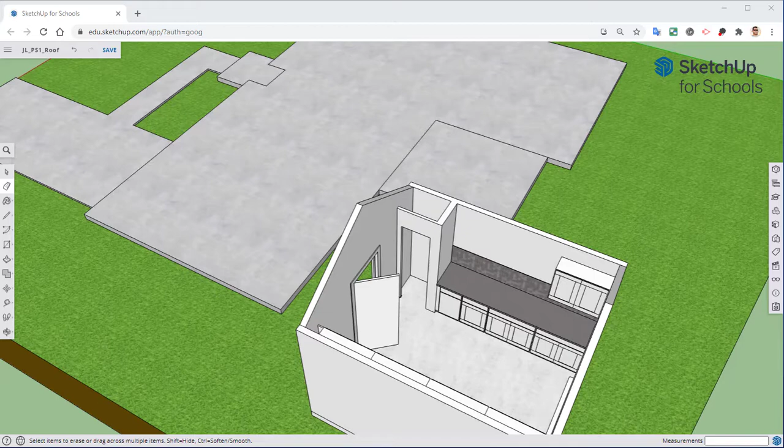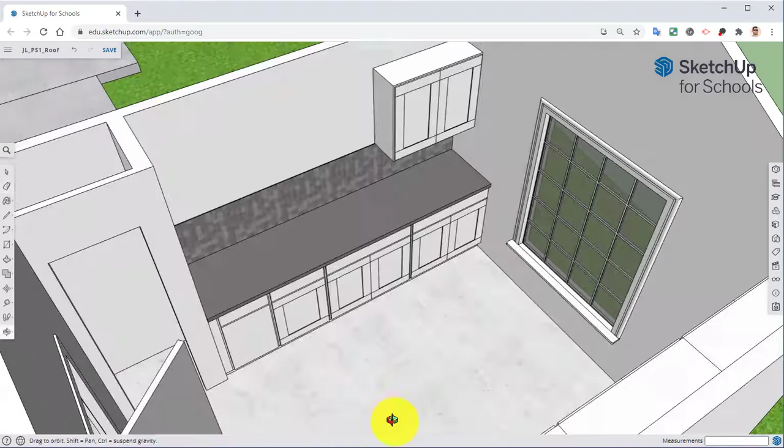We're also going to work on putting in some textures both on the inside and the outside. I've also finished up most of the shaker style cabinet doors, so that's something we'll finish up. I'll do our last one right here, and between that and the last one we did in the previous episode, you'll go in and work on finishing up the rest of them on your own. So let's get started.

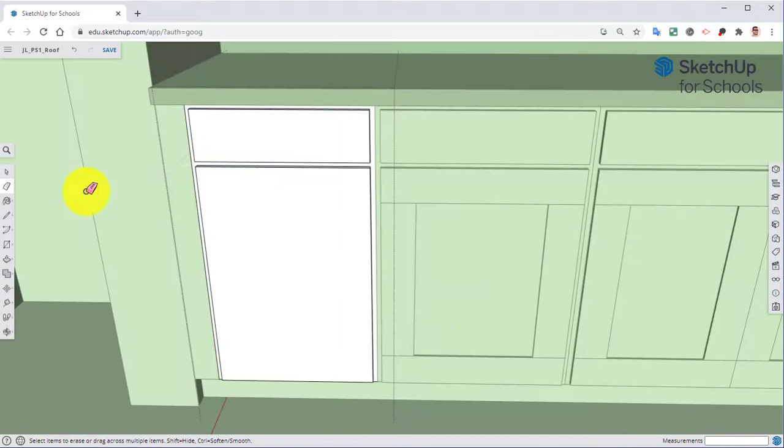For the shaker style cabinets, we're going to take our tape measure. All of these are 3.5 inches, so I'm going to go through and create a guide that is 3.5 inches.

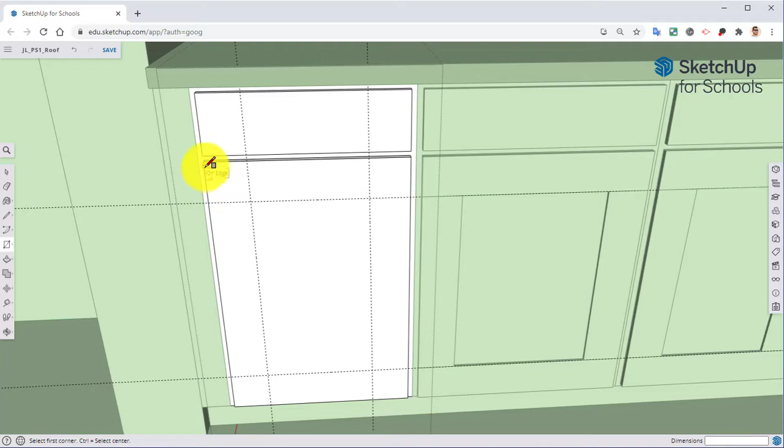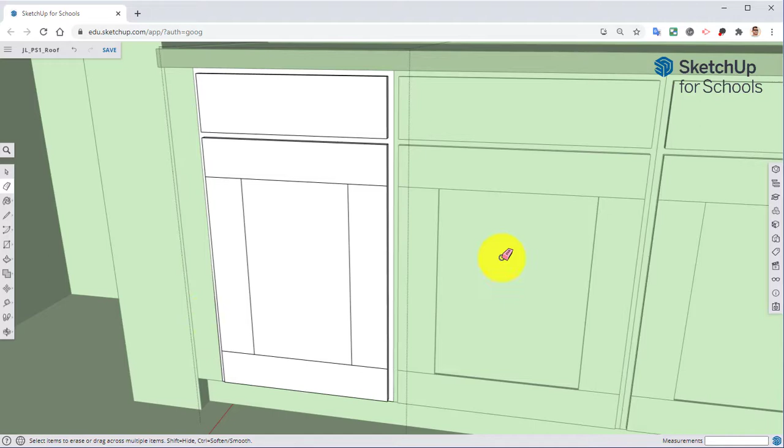With that, take our rectangle tool. We go the full length on the top and bottom, then go in and fill in the middle areas on both the left and right sides. With the eraser tool, we can erase our guides - you can leave them up if you're doing the rest of them. I completed mine a little bit ago, so I'm going to go ahead and erase mine.

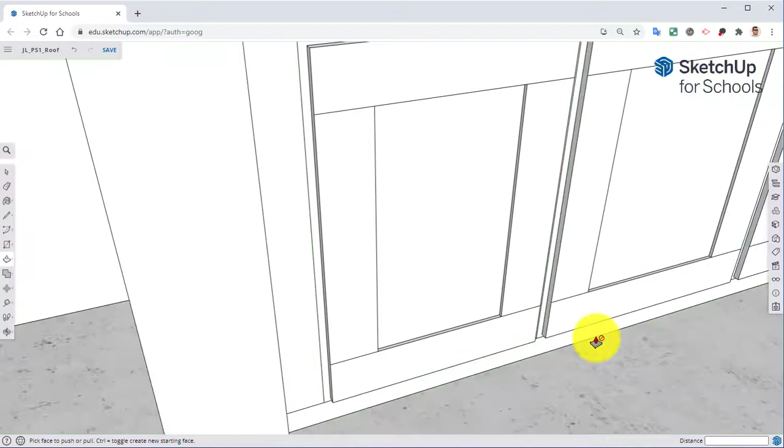Next, click on the push-pull tool. On the center part, push it back a little bit. Type in 0.25, hit enter, and that pushes it back just a quarter inch. Right-click, close component, and that's all there is to it.

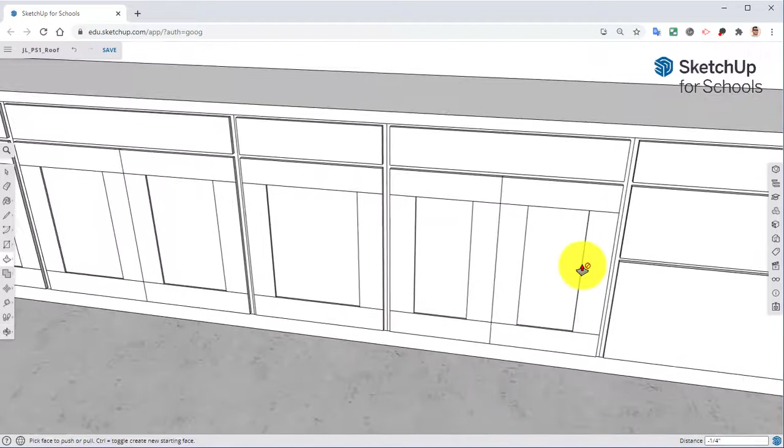The rest of these - once you do one, it's going to work for others, like this right here. These two right here are copies of this right side, so once you do both of these two, those two will be done as well. I didn't really touch these since I'm mirroring those off of those, so you don't have to do any of that, just the large doors.

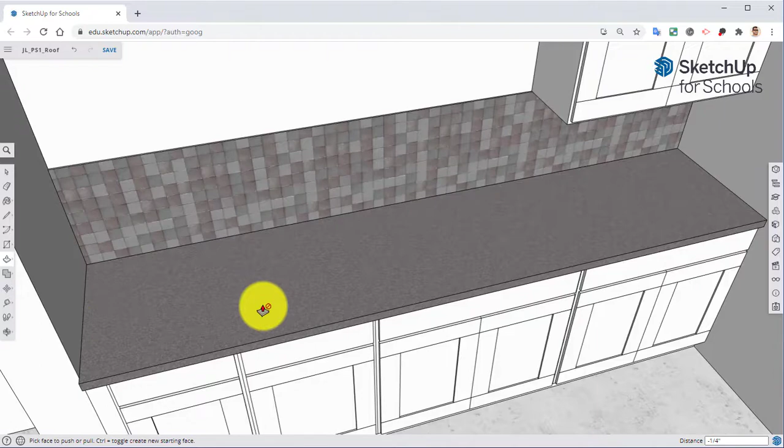Over here, we started putting in textures as well, so we're going to do that here in a second. I'm going to finish up the closet door first, but that's what we're going to go and work on and try to mirror on the other side.

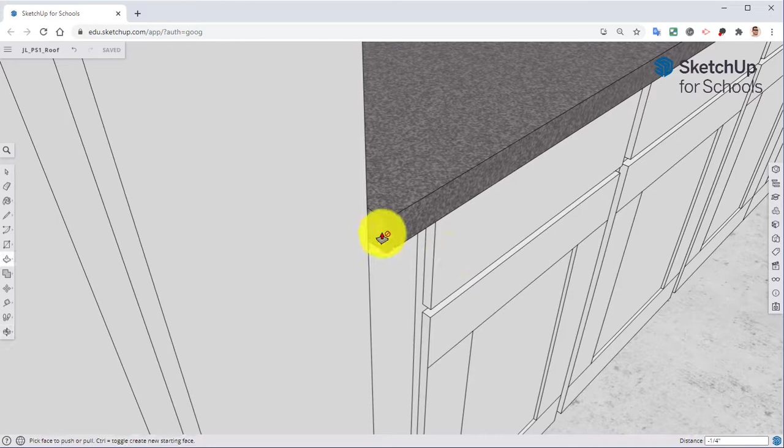For the door, there's, at least on my understanding, not really a way to put a door here, plus we have the overhang of 1 inch here. So what we're going to do is right click, edit the wall here, use the push-pull tool, and pull this wall out 1 inch. Then we're going to close the group.

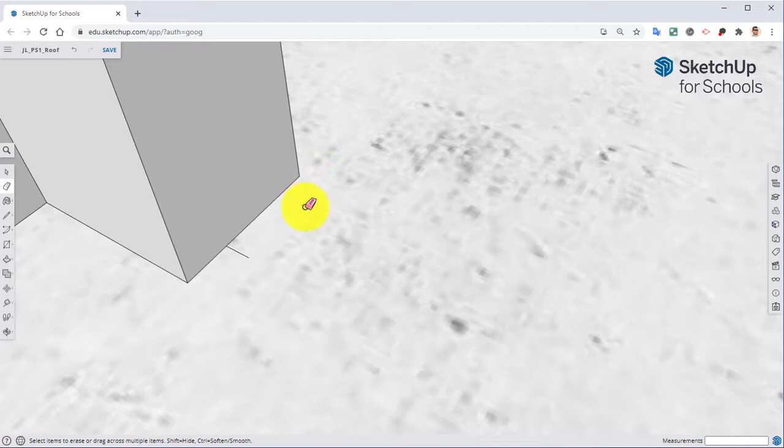Down here, we're going to create our trim for the actual door. Take our tape measure, go from the wall outwards 0.5 inches. I want to click once, drag it back to where it's actually set at 0 inches, click there, then pull out from that point 0.5.

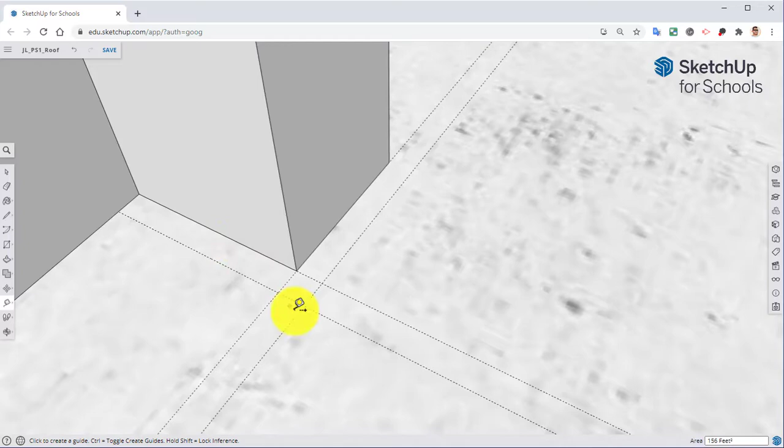I want to create a guide right there, so I'm just going to double click along the wall. I'm going to go to the opposite side, go from this guide back 2.5, double click right there, and 0.5 right there.

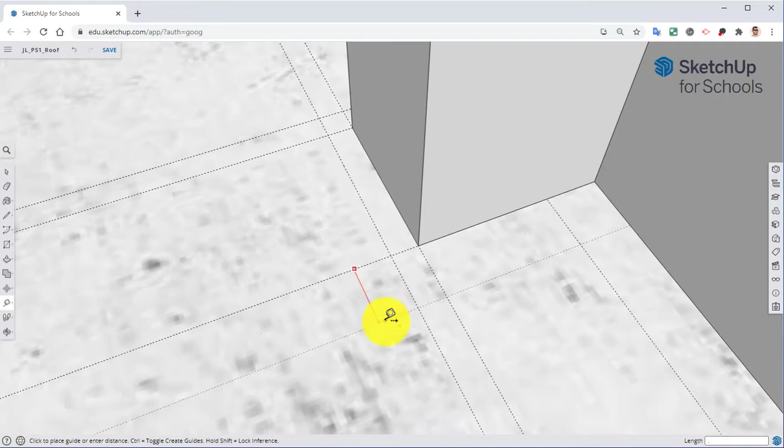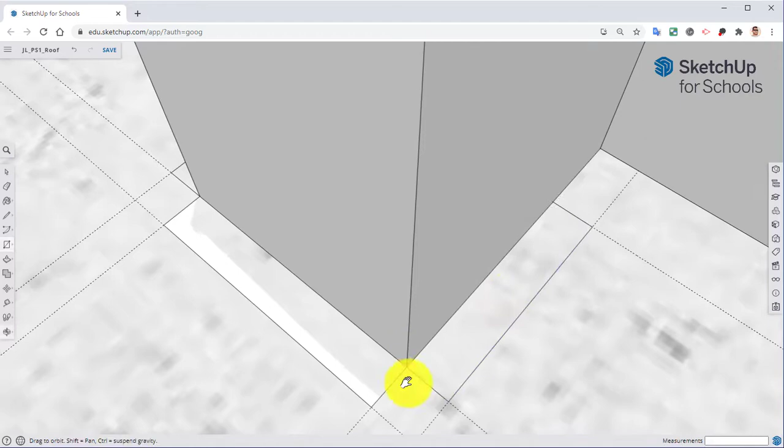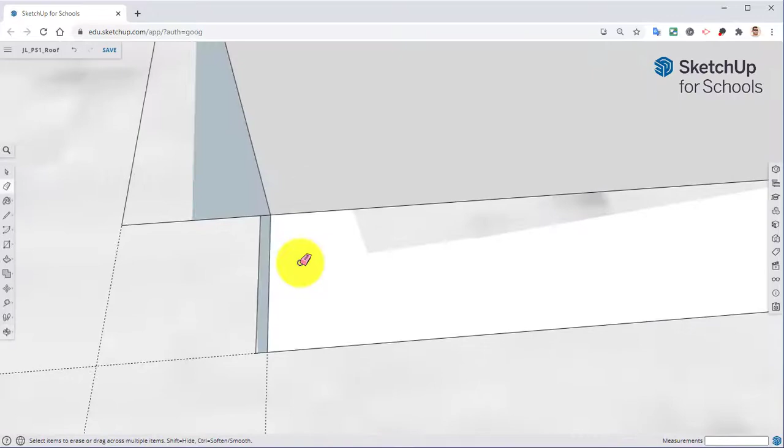Now let's select the R key for the rectangle tool and draw in our rectangles. I do need these to be connected, so I'm going to draw a little sliver of a rectangle on each side, sort of mimicking paint and caulk and everything like that - that would kind of be there just to give us where it's connected. We'll be using the Follow Me tool, so we need all this to be connected so it makes everything easier.

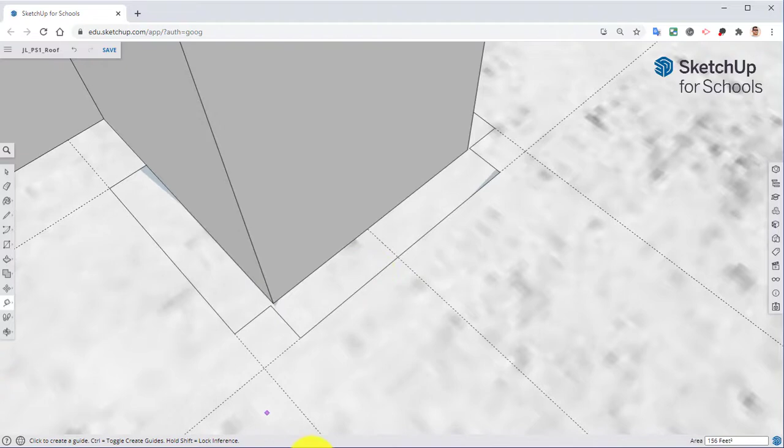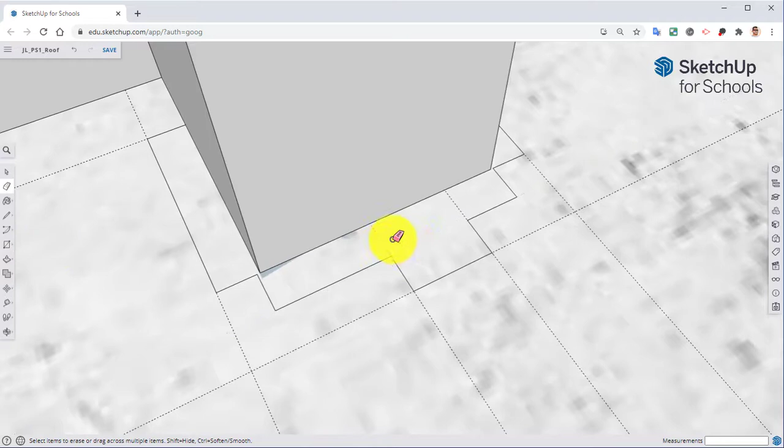From this point, our thickness of the door is 1.38 inches, so we're going to type in 1.38 - that's the thickness of the door. From this point, we're going to go 1 inch for the door jamb. Click the rectangle tool - first draw in 0.75, then take the rectangle tool and draw in our rectangle. Now we can clean up all of our lines and we have our trim.

Take our line tool, go in, and I'm going to draw a line around our door.

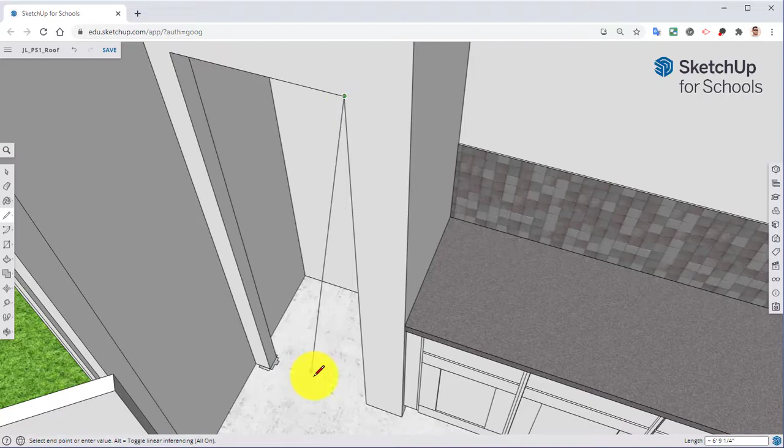Hit escape, hit the space bar on your keyboard. Hold down shift, click on all three of those lines. If you can't tell that you clicked on it, you can move a little bit and you'll see where it tints blue.

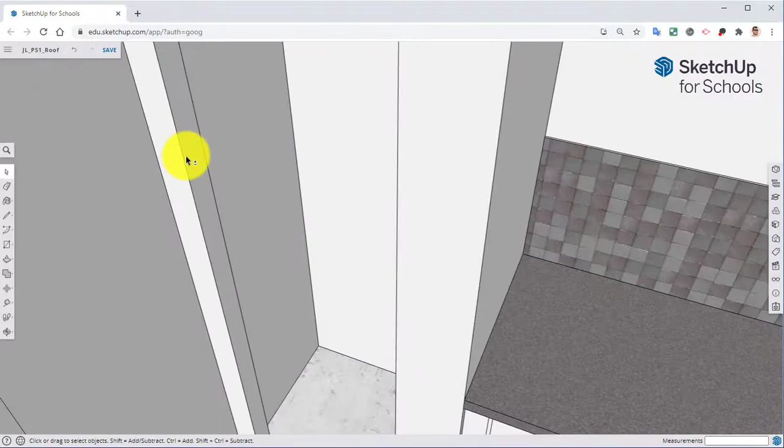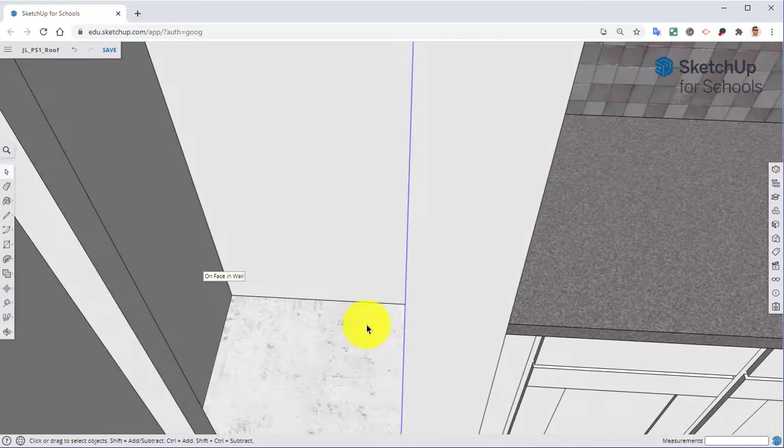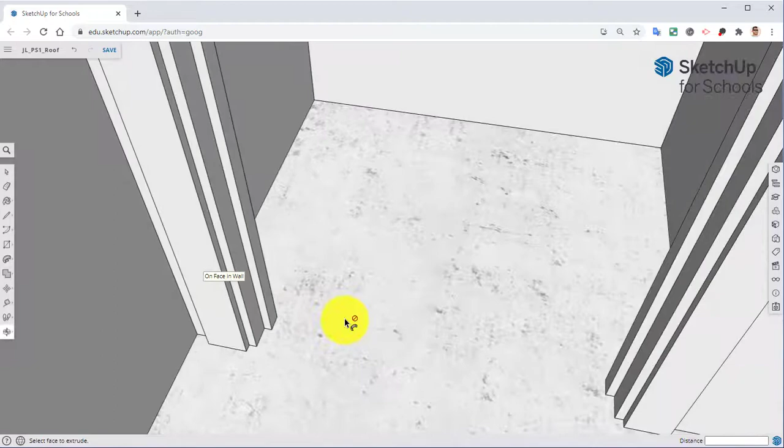Now that all three are selected, click on the Follow Me tool and then click on the piece. For some reason it really does not like that - you have to change and select another tool. So we're going to try to redo this again. Follow Me tool, click on our face, and there we have our shape.

Let's go ahead and triple click on that, right click, we'll make that a component. Closet door trim, click OK.

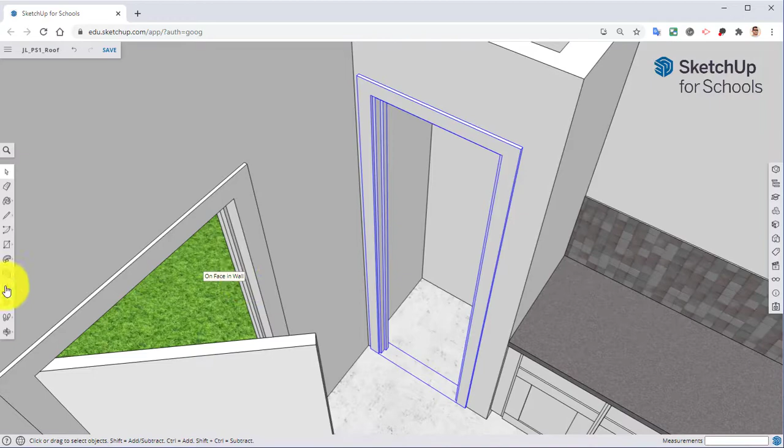Now we're going to select the rectangle tool. I'm going to go underneath, select that corner. Try to get my way around and go to that bottom corner. Select the push pull tool, we're going to pull this out 1.38.

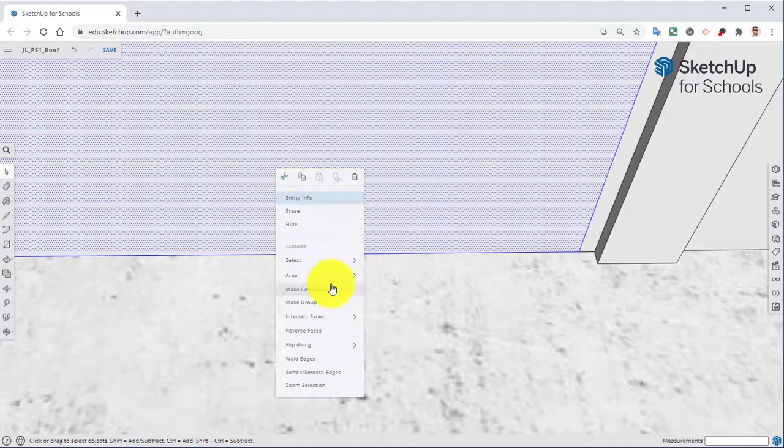Triple click on it, right click, make that a component. Closet door. Now hold down shift, select both of those, right click, and make that a group.

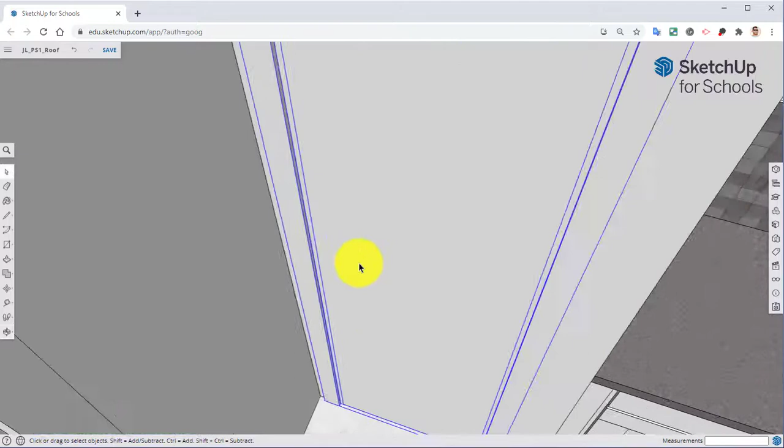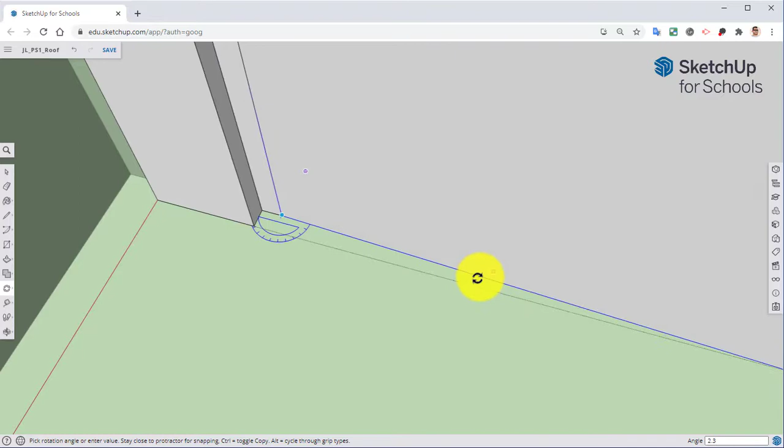There we go, all right. Next, we're going to open it just like what we did with the front door. So I'm going to edit the group. We're going to select the rotate tool, which is behind the move. We're going to select that corner, click on the corner, drag out, set the 0 mark, and then we will open it up to some sort of amount - it doesn't really matter which.

Now we can go ahead and close our group. Texture-wise, we can start with the outside.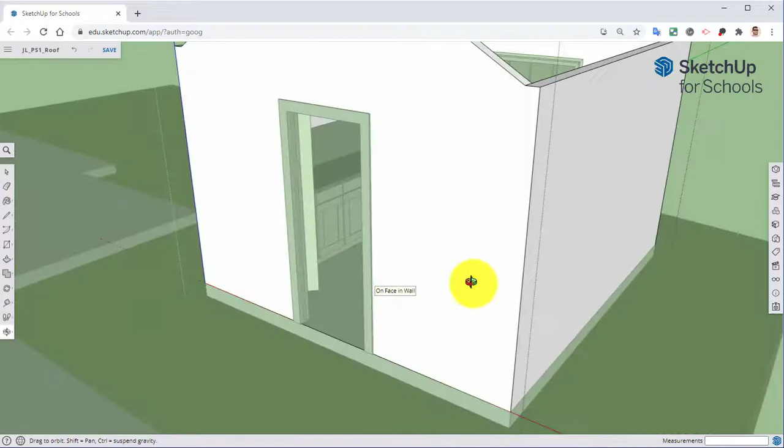So we want to right click, edit group, so that way we're editing the wall itself. We want to always put the materials inside the group or inside the component, so that way we can edit the texture. So if we go over here to our materials, we can click on this icon to browse all the different textures and materials we have available to us. They're all set in different categories.

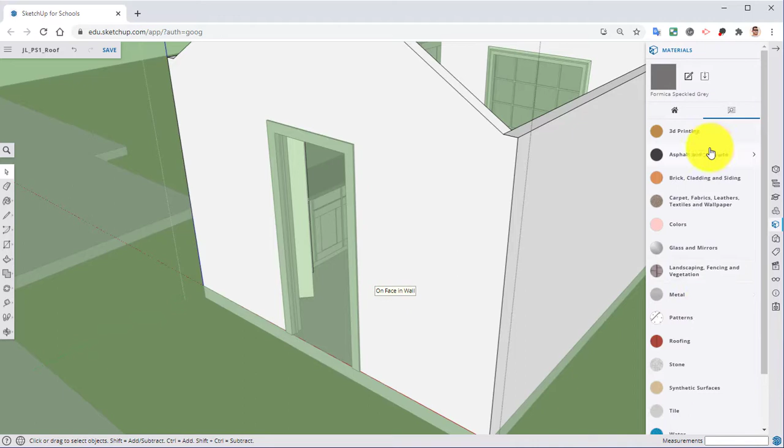We want to do a brick cladding and siding, and I want to just do this cladding siding white. Go ahead and click.

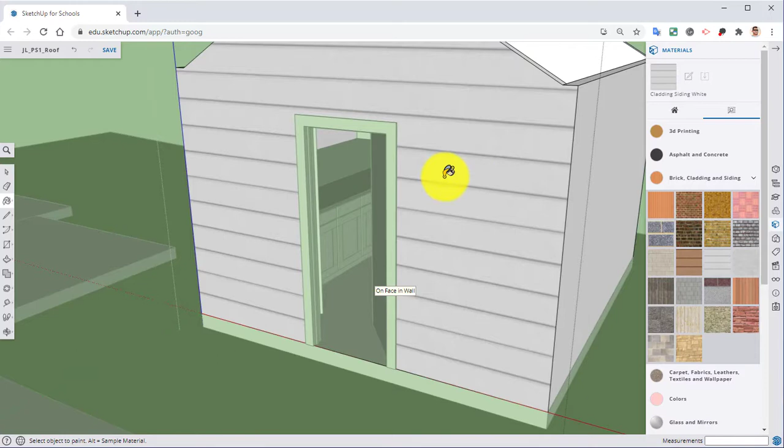If we need to adjust this, we could. So right click, go to texture and select position. If you do not see this texture icon whenever you right click on the texture, that means you did not put the texture inside the group. This will not show up if you put it on the outside group. So go ahead and undo it, go inside the group or component and try it again.

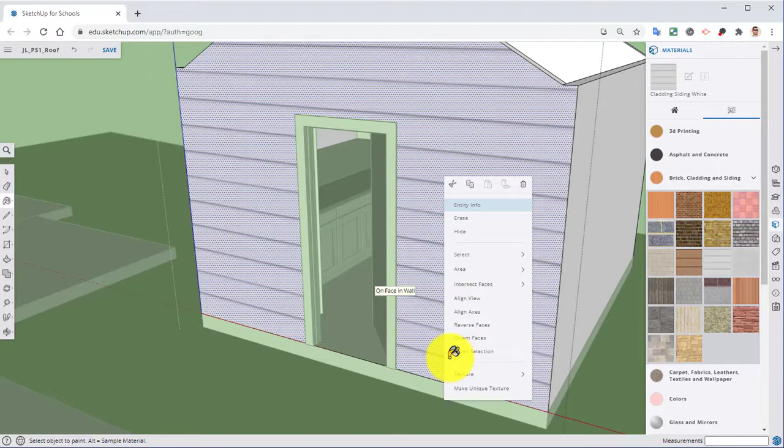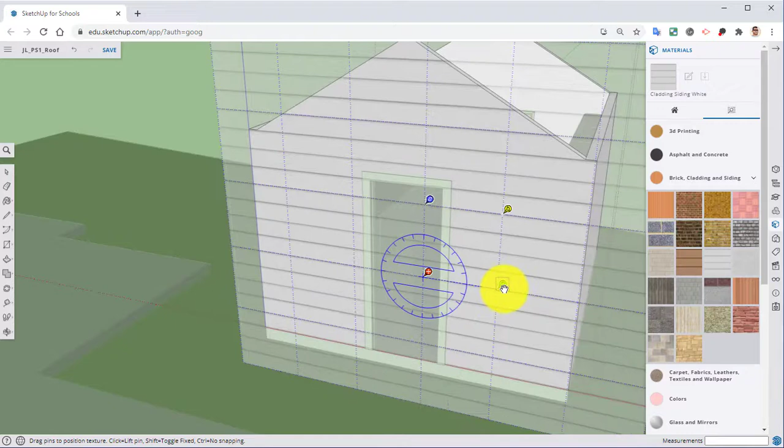But we can click position - this brings up our 4 little icons. The one you'll use most often is the move, where you can move the texture, or this right here, which rotates it, so we can rotate it around. We can also scale it up and down. So I'm going to set it right here, make sure that my very bottom one is down towards the very bottom. Once it's looking the way I want, click enter.

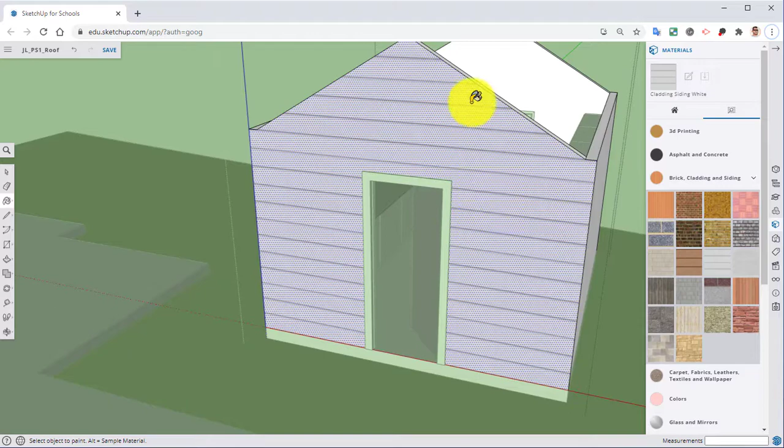I want to copy this one going all the way around. I don't want the siding to be a different position than on the right or left side. So I'm going to hold down Alt - it comes up with the little eyedropper tool. I'm going to select that front wall, then come around and paint the other walls. And you'll see that they all line up with that new change that I did with the front.

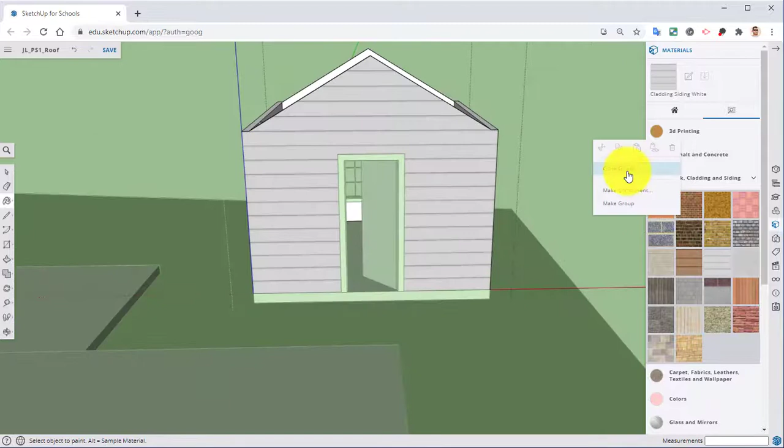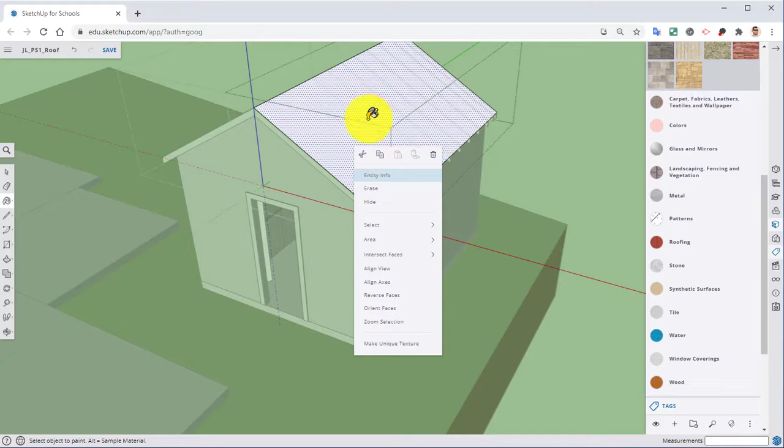Go ahead and close group. Let's really quickly go over to our tags panel, and I want to turn on the roof. I'm going to edit the group - I need to edit that group as well, just to make sure that I'm all the way down. And if I right click again, you'll see how it turns into the speckled pattern. I want to select our roofing, and I'm just going to do basic shingles.

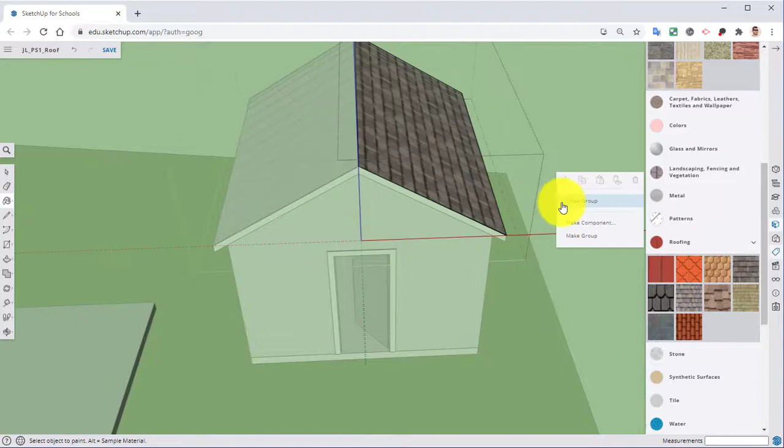I'm going to right click, texture, position, and I'm going to just move these down to the bottom. Close group, go over to the other side, and I will paint those as well. Right click, close group, and we have that right there. I'm going to go ahead and hide my roof again.

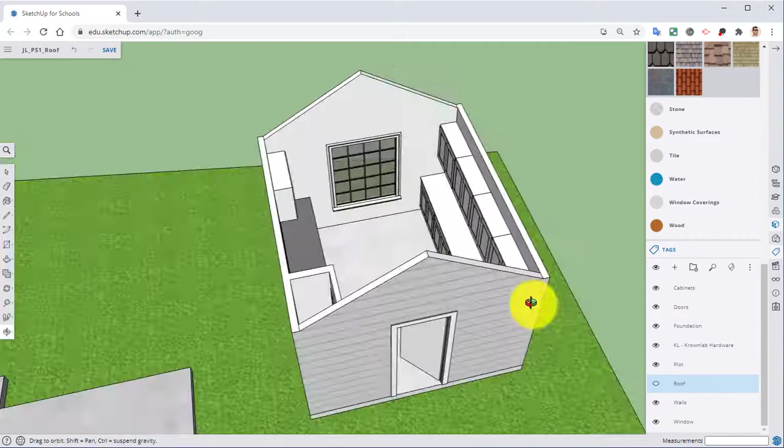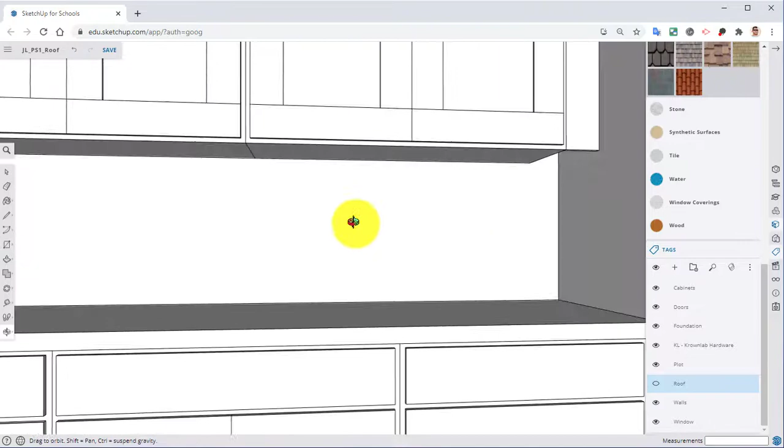So we're going to paint the countertop, and we're going to create a little backsplash. So over here, I want to create a rectangle going from one side all the way to the other. I'm going to take my push-pull tool, and I'm going to pull that little rectangle out 0.25.

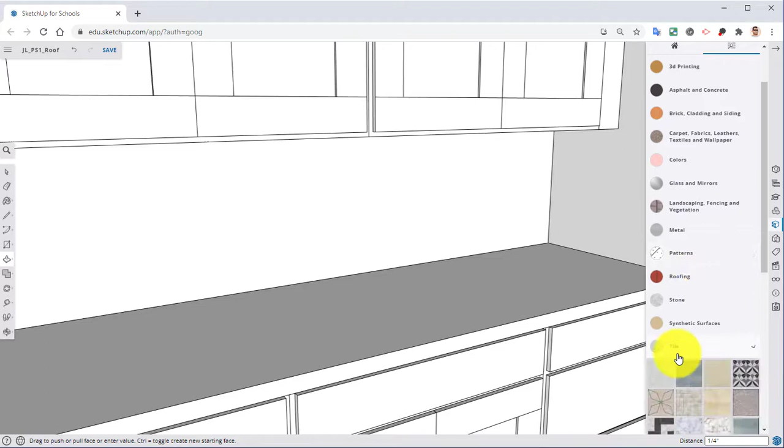For this right here, we're going to go to tiles, and I'm going to use this small little square tiles. I'm going to place those there. I don't want that blue color, so what we're going to do in order to change the color of it, select the home icon.

Scroll down until you find all the texture, the materials that you're wanting to change, which is the blue squares. These are all the different textures that is in your model, whether it is in your model now or it used to be. So you see these right here, those were in this at one point. They're no longer there now, but they're still showing up.

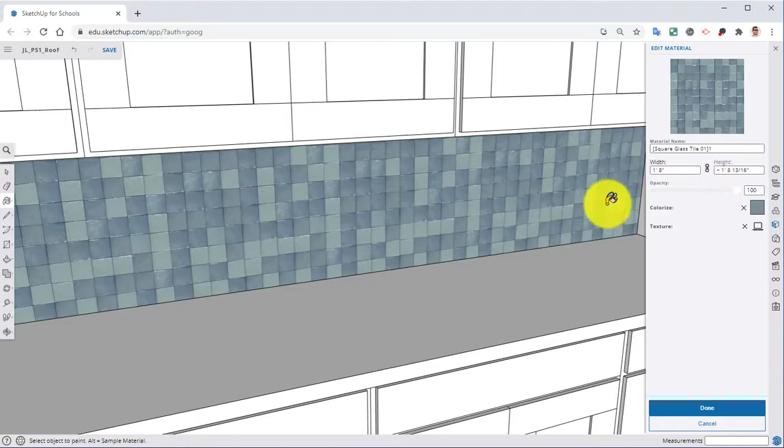So select our icon, go up here at the very top where it says Edit Materials, go ahead and click on it. Now you'll see where we can change the width and the height. We can change the opacity, and we also can colorize it. So we can click on the little square of the color, and I'm going to just click to the left of that blue in order to create a kind of grayscale color. Then go ahead and click done, and now we've changed the color of that texture.

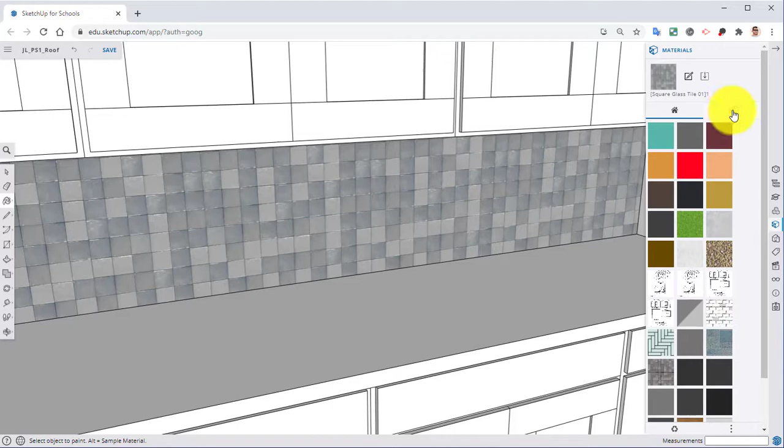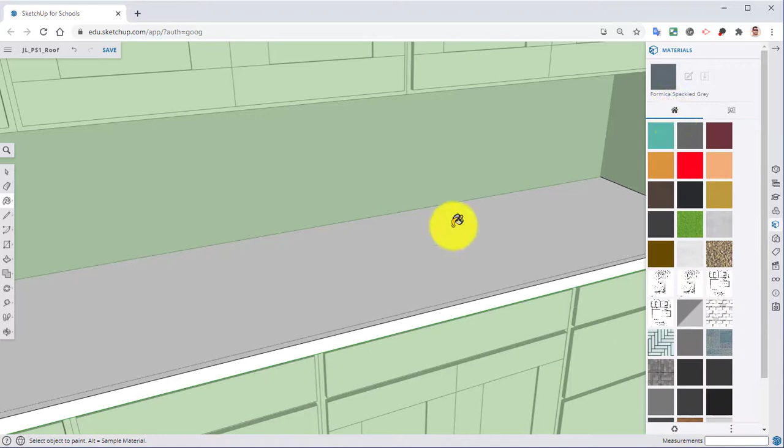I'm going to go back to the different categories. I'll right click and edit the group of the countertop, then go down to synthetic surfaces and click on that grayish black color. It's a Formica speckled gray.

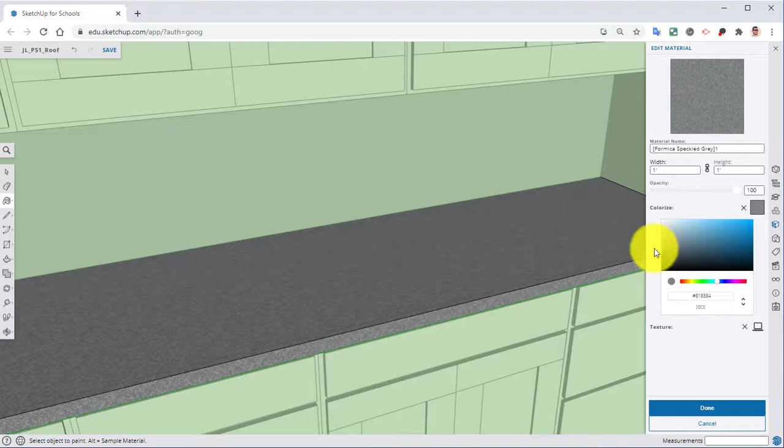I'm going to color the countertop. Just like before, click on that color, the very last one. Go up to edit materials, click on the square, and lighten it up to match our backsplash a little better, shifting a bit left and up.

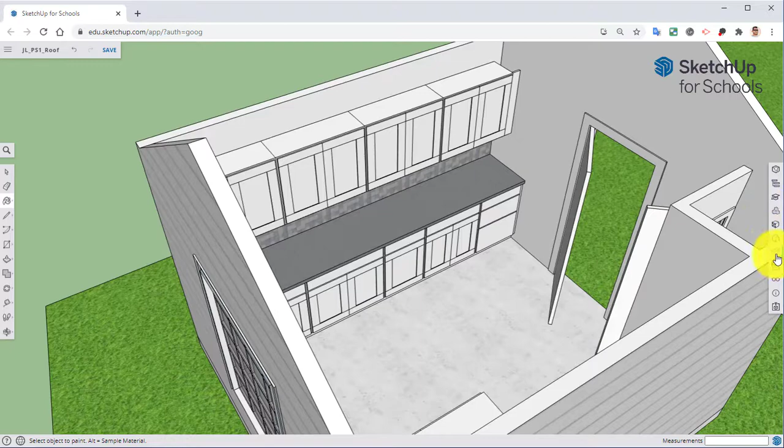One last thing I want to do is turn on the roof, and turn off the foundation and the plot.

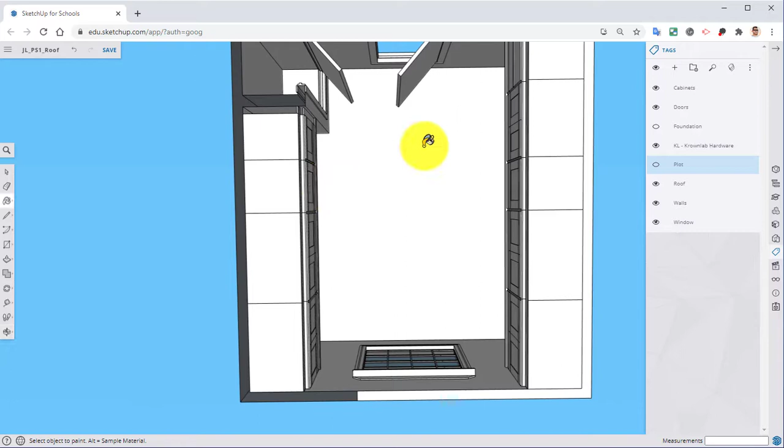So this is our ceiling, and I want to put in 2 recessed lights here at the very top. I'm going to turn off my cabinets so I can see things a little easier, and find the center point of my ceiling.

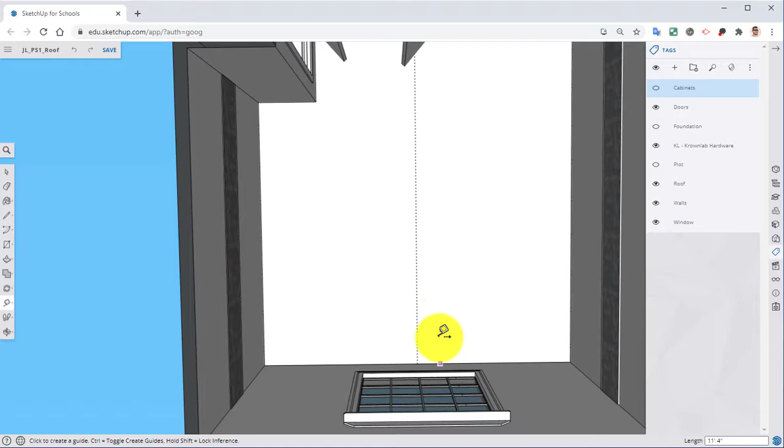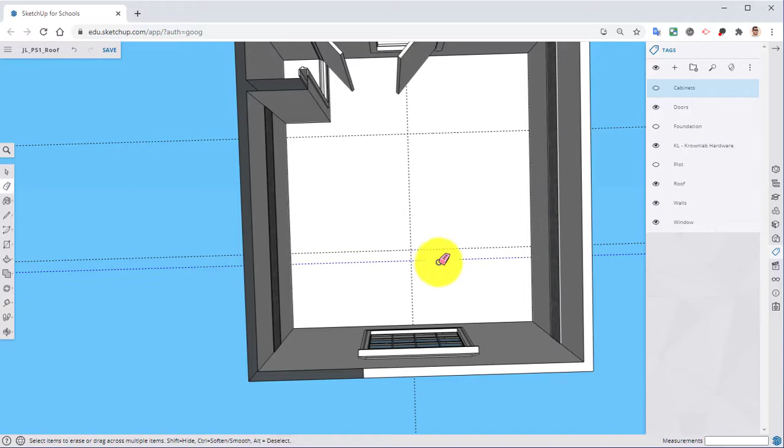I'm going to go 2 feet, then 3 foot from there, and another 3 foot from there. Actually, let's go another 6 inches, and another 6 inches on the other side. So this is where we're going to put our 2 recessed lights.

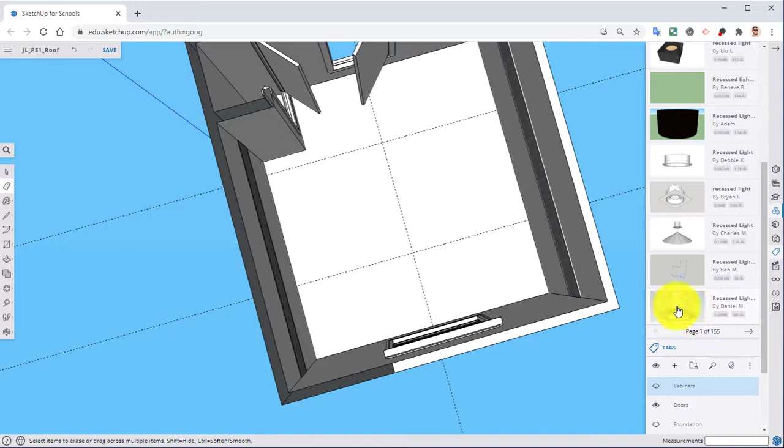If we go down to our components where it says Search 3D Warehouse, we're going to search recessed lights. Scroll down until you see this Recessed Lights by Daniel M, and click on it. It will load up on your screen.

I'm going to click on that center point, hit Control, and move it straight up, then place it there as well.

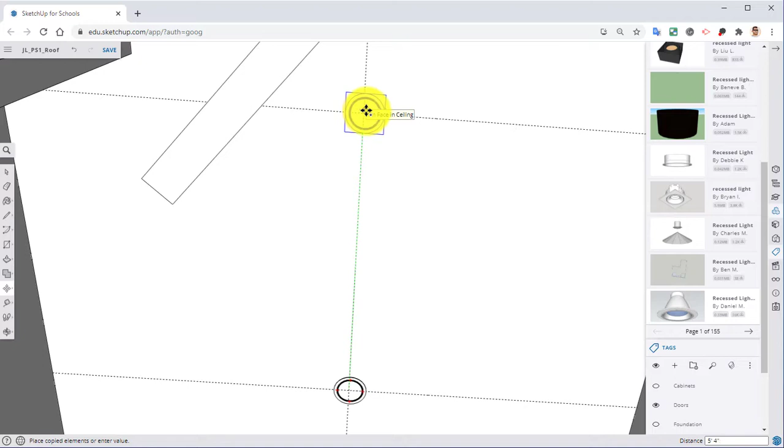Next, I'm going to right-click and edit the ceiling group. Go to your rectangle tool, select the circle, find roughly where the center of the circle is, and draw out a circle.

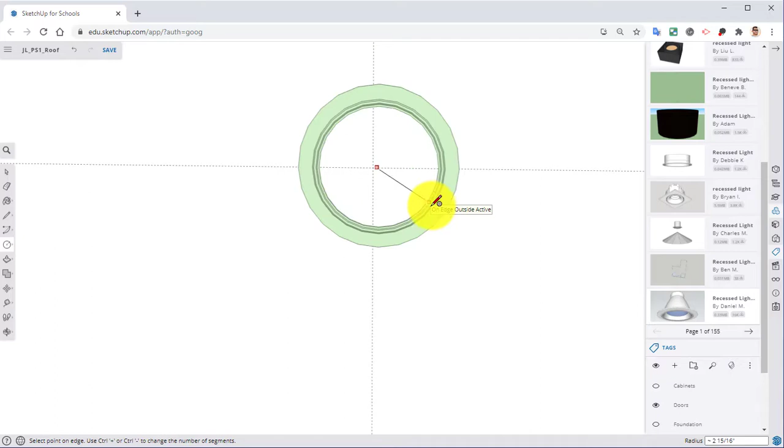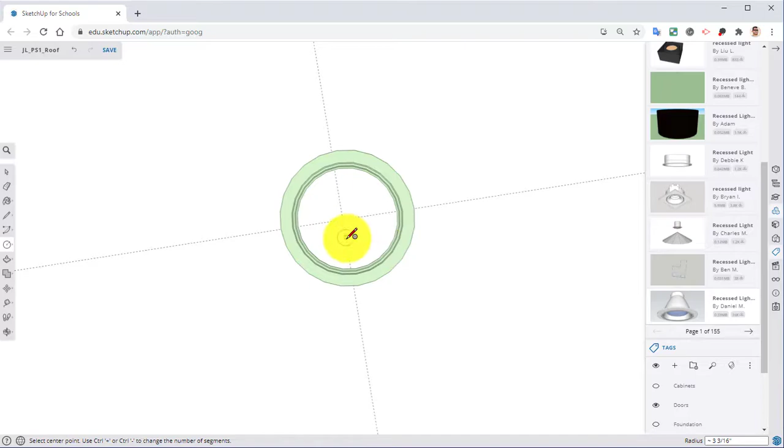Take your push-pull tool and simply pull that up and out of the way. Go down to the other one and do the same thing: find roughly where the center is, set that push-pull tool, and push that circle up and out of the way.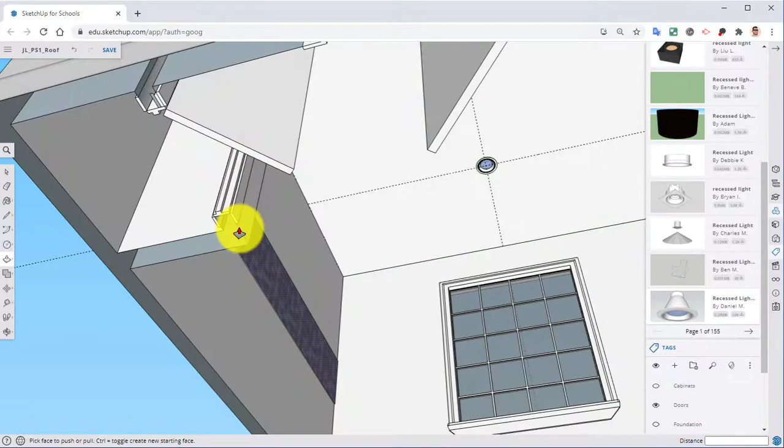We can then go in here and find where our thing is. There we go. Right click, close group, and erase our guides. Now we have our little recessed lights in our ceiling.

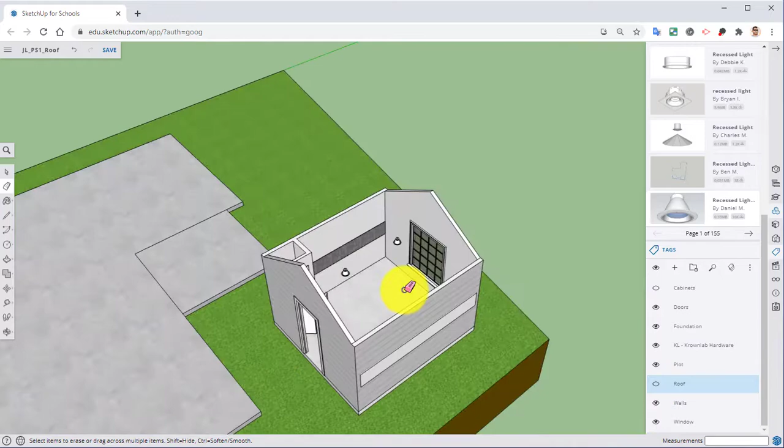Let's bring back the foundation and the plot. I'm going to hide the roof. We can also go back into the 3D warehouse and search for an outlet.

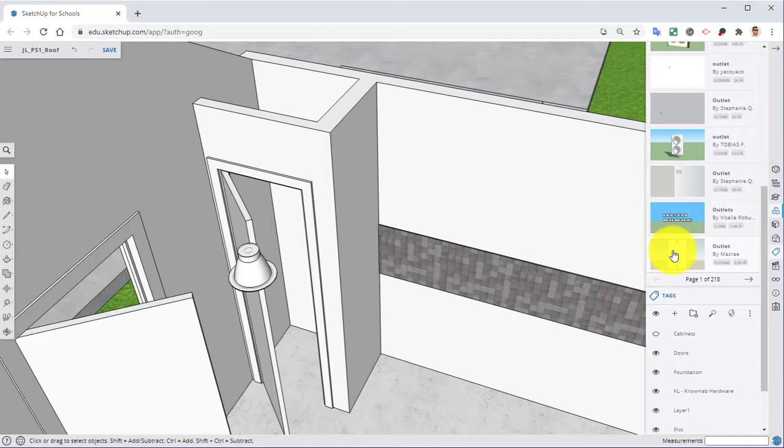At the very bottom for me, I just want to find a basic outlet. Click on it, bring it into our project, click somewhere in order to get it set, then click on the center.

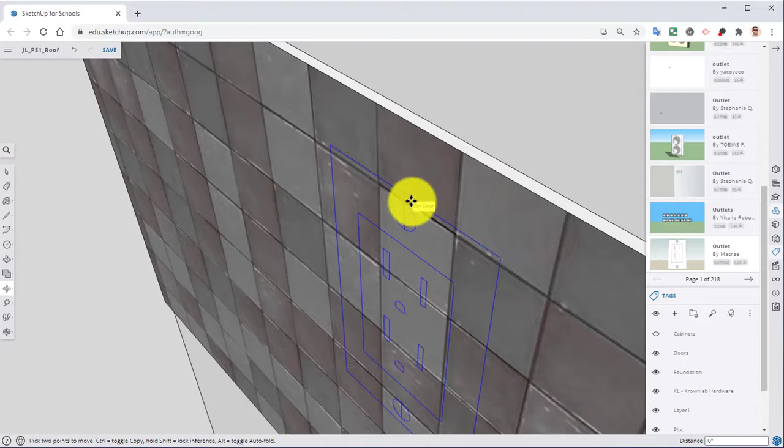We want to bring that over here to our wall. Put it on the wall first, then use your keyboard to get it actually sitting on the outside of the wall and our texture. Once it's placed on the wall, we can go in and move it where we want to.

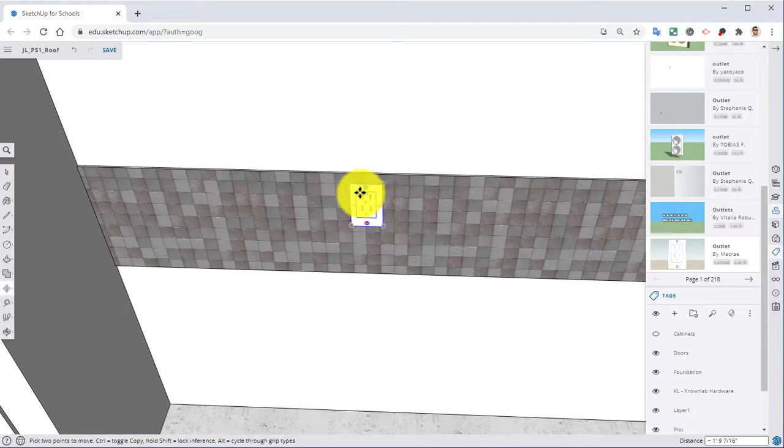I kind of want to move it over and down to around that area. We can come in here and bring back our cabinets. So that's where I want to place one.

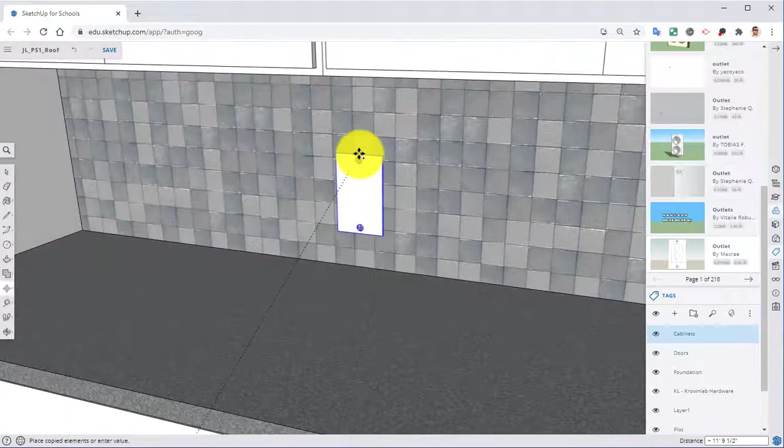Go ahead and hit Control with the Move tool, move it over here to the right. I'm going to select and hover over the top of it with the Move tool to rotate it around.

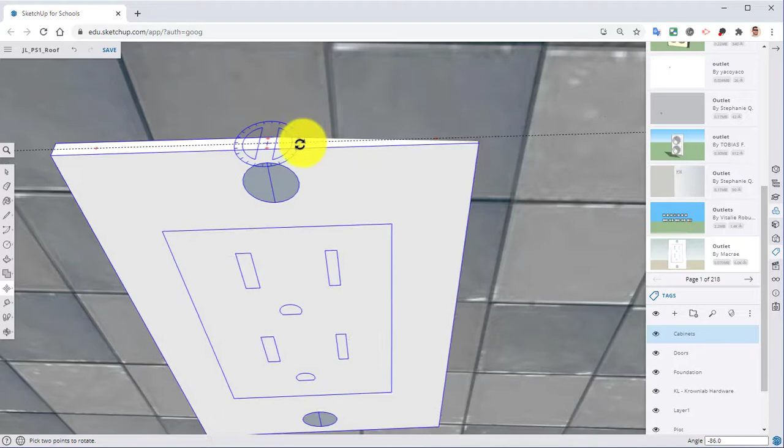Get that positioned, so there we go. Make sure that it is flush against the wall, and put it in this general area.

At this point, this kind of ends our project. So I'm going to go ahead and save this right here, and close up the 3D warehouse.

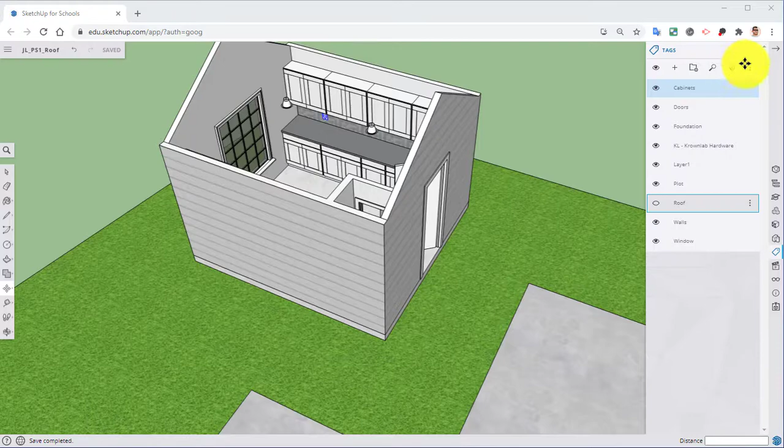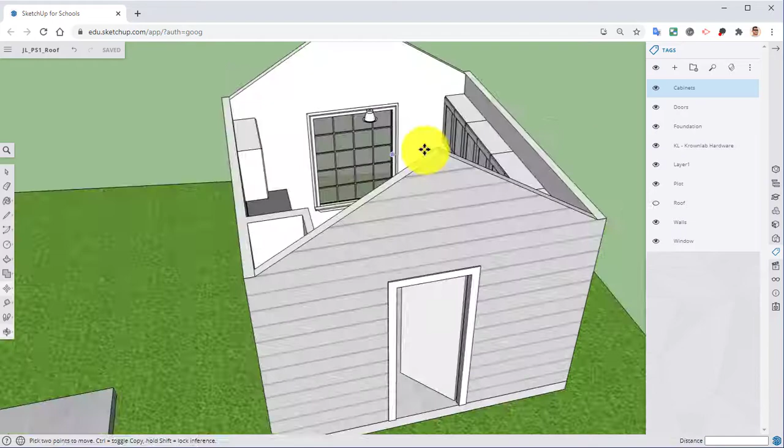We'll have our tags up. After you save your project, go and take 2 screenshots: one of this position showing the outlet and the lights, and also show this side as well, showing both our new closet door, your tiles and textures and everything like that. Make sure you do both sides, and make sure you put in all the shaker style cabinets for the doorways.